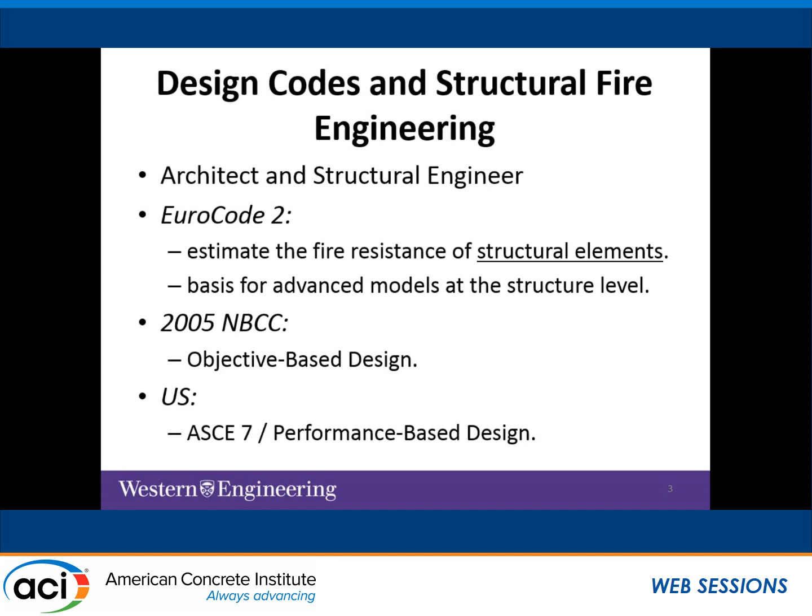So my research objective is basically to develop simple methods that can develop the engineering sense. One of my great instructors said, a calculation that you can make on the back of an envelope is much better than 100 pages of computer output. So that's what I'm trying to achieve, to get things in a simple way and develop tools to analyze the structure first and then to assess its capacity second. So I'm trying to do both.

And I'm trying to cover the overall picture here, and as time allows, I might go into one of the tools that we developed in a very simple way. So our first main challenge, and it's a challenge that you can find even in the Eurocode, with the isotherm method.

The non-uniform distribution of temperature within the section means that your thermal strains are non-uniform. So imagine a concrete section with non-uniform thermal strains. Can this happen? Can you have a section with this shape? Can the section develop such a curved shape?

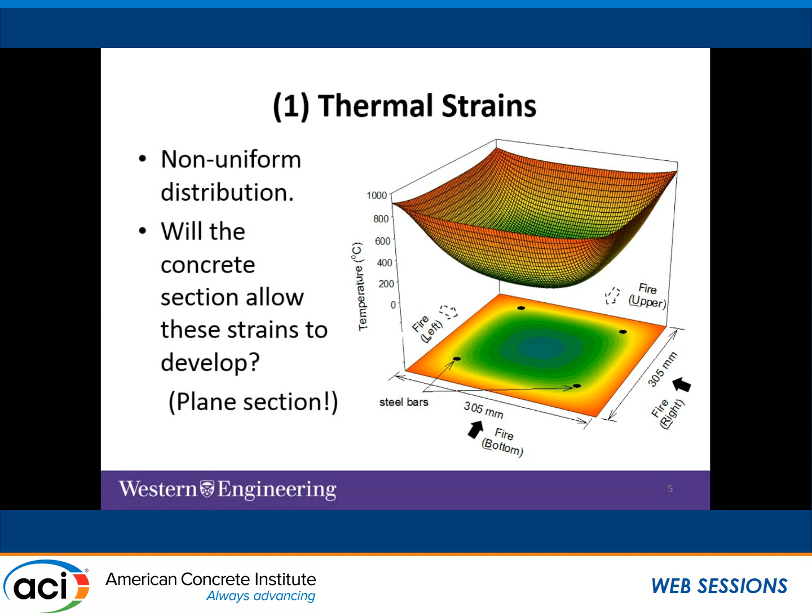And based on this, we started to look at how it's happening. So this was our first challenge, and I'll say in a second how it works. The second challenge was the 2-dimensional temperature distribution, which is really hard to deal with, while most of your structures, most of your beams, most of your columns, you are analyzing them at the end for simple bending, one-directional bending. So we said, okay, we want to simplify it to be able to analyze them for single bending.

And the zone method, which was mentioned before today, is a sectional analysis where you divide the section into layers. So if we are dividing the section into layers, if I do the temperature distribution in the section, which is shown here by the contour lines, the temperature in each one of the small squares is different. But the temperature for the layer, for bending analysis, I can get using an average temperature. And then we started to think what kind of average temperature to use.

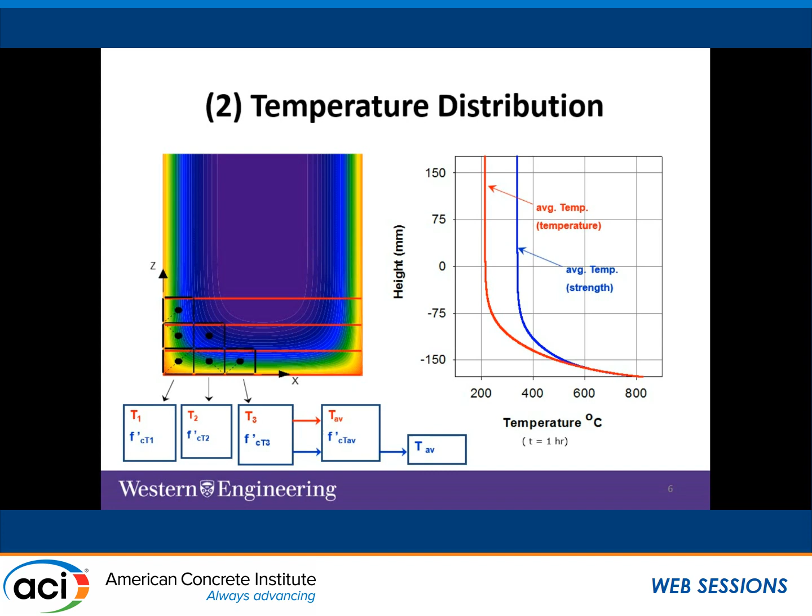Then the strains: as was mentioned, you have transient strains, you have thermal strains. All of those strains are linear functions of the temperature. So because they are linear functions of the temperature, taking the normal average of the temperature will be good to evaluate those strains. So we evaluated 2 temperature distributions: one based on the average, and one that will give you the average strength.

So again, I'm speaking about the same point that I started with: if this is a beam, your temperature will look like this if you cut a section in the middle, and it's trying to induce more thermal strains at the bottom. And because the temperature is trying to induce more thermal strains at the bottom, your section will remain linear at a certain point in between this curve.

And if you look at the section, any point that is above the line is in tension. Any point that's below the line, so this area, is in compression. So this concrete area is in compression, while this concrete area and the steel bar are in tension. This steel bar is in tension as well. So doing a couple of trials, you can get the lines that will lead to equal tension and compression, and those are self-equilibrating forces, self-equilibrating stresses.

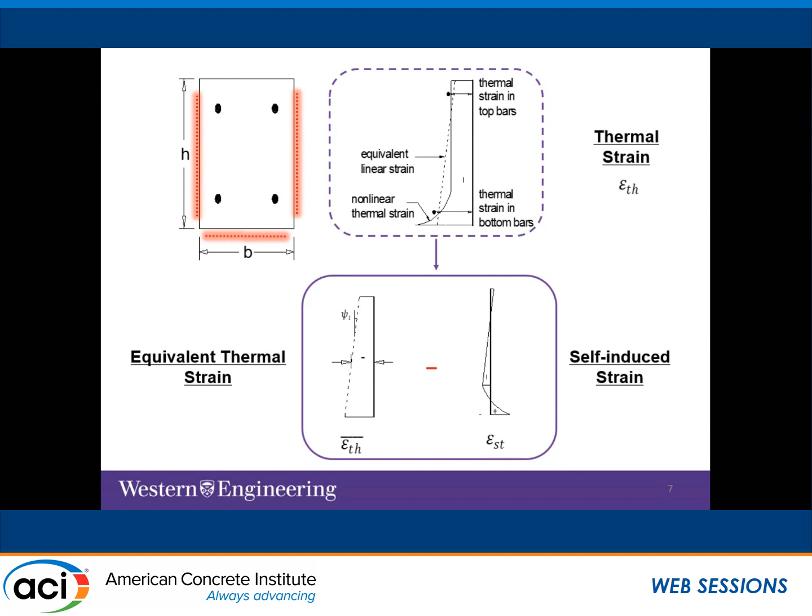If you have a positive bending, your steel is exposed to temperature, which means that the steel loses its Young's modulus, and it's much lower. So for this steel to develop any force, you need to move it a little bit more than the steel in the top, which will make this line almost linear. So when you have strain in the steel in the bottom a little bit more than the top, your linear strain is having a smaller curvature. So this was the direct reason for this.

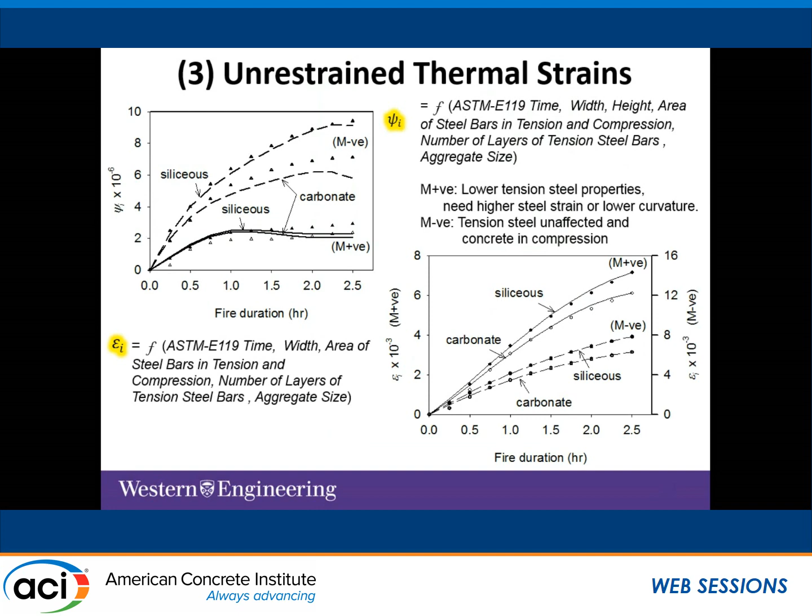For negative, your tension steel, which is in the top, is unaffected, and concrete is acting in compression. Even if it's affected by fire, its Young's modulus is not affected as much as the steel is affected.

Then we applied the sectional analysis at elevated temperature, and we started by adding this initial self-induced strain. Once you have it and you have layers in your section, we started first with the column section, and we started to add uniform strain across the section, adding it to these values, going to the material properties, and figuring out the capacity of the section.

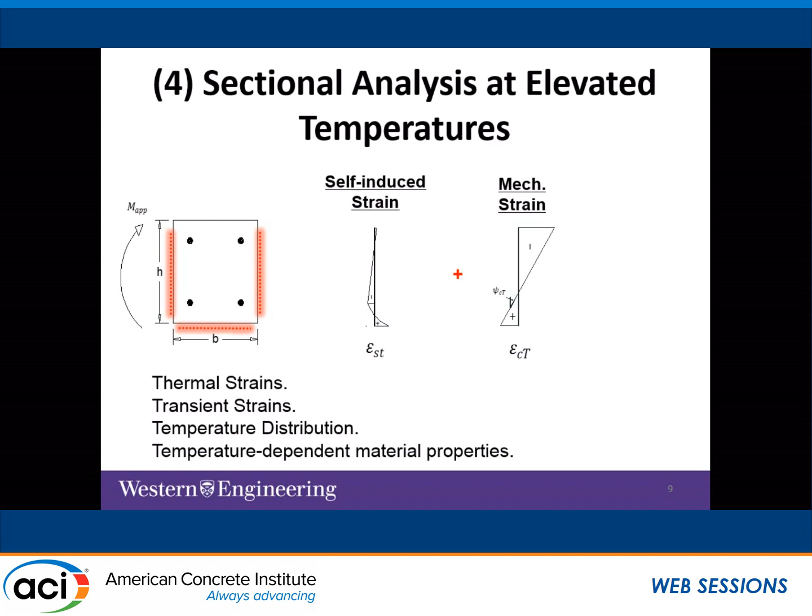We considered the thermal strains in this way. Transient strains were considered in the material model for concrete. And we considered, of course, the temperature distribution and temperature-dependent material properties. And we came out with two curves for each section. One defines its behavior as a column, and one defines its behavior as a flexural member. So one gives you the axial force versus axial strain, and one gives you the moment versus curvature.

And you can see right away the curve is not starting at point 0. And this start, which is here and here, is linked to psi I and epsilon I that are coming from the thermal analysis. So because of the thermal analysis, there were some strains induced in the columns without any load applied, and those strains are represented here. Some curvature induced in the section, and that curvature is presented here without any moment applied. We are assuming an unrestrained section. If you have a restrained section, you have to use those to figure out your restrained condition.

Then we got the full P-epsilon curve and the full moment-curvature curve, and the secant slope at any point will give you EA effective and EI effective for the section. And again, we simplified those two terms, EA effective and EI effective, and we give them as equations, not easy equations again, but equations that are a function of a lot of things, including the axial load level and the moment level. And this is again for a standard fire curve.

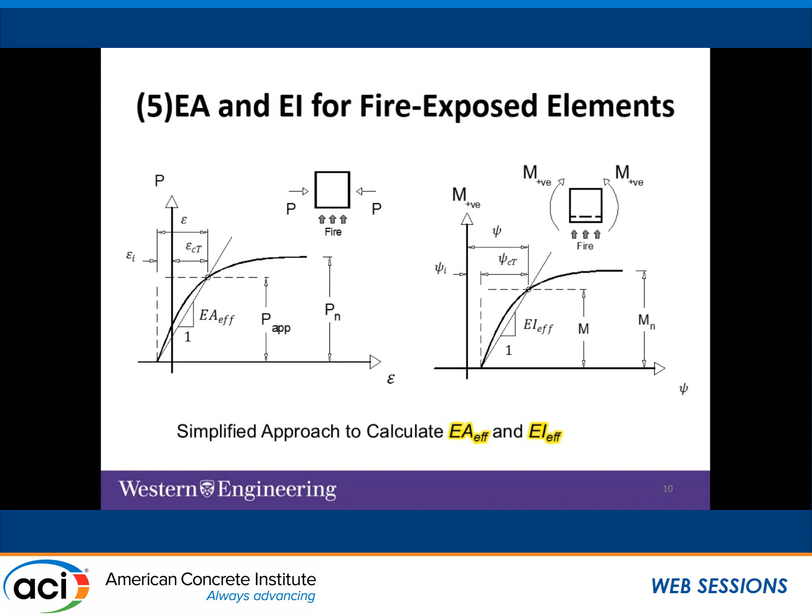Then we started to analyze continuous beams and frames. We tried this procedure for many elements. So first, as a procedure, we suggest that you first use SAP, or any program. You can calculate your primary moments and axial forces in different elements. Identify elements exposed to fire, go to our model, calculate your epsilon I, psi I, EA effective, EI effective, convert them to elongation and rotation, and apply this elongation and rotation to the structure, which will give you what we call secondary moments. Get the secondary moments, recalculate EA effective, EI effective, and the primary moments, which are going to change, and do the loop again.

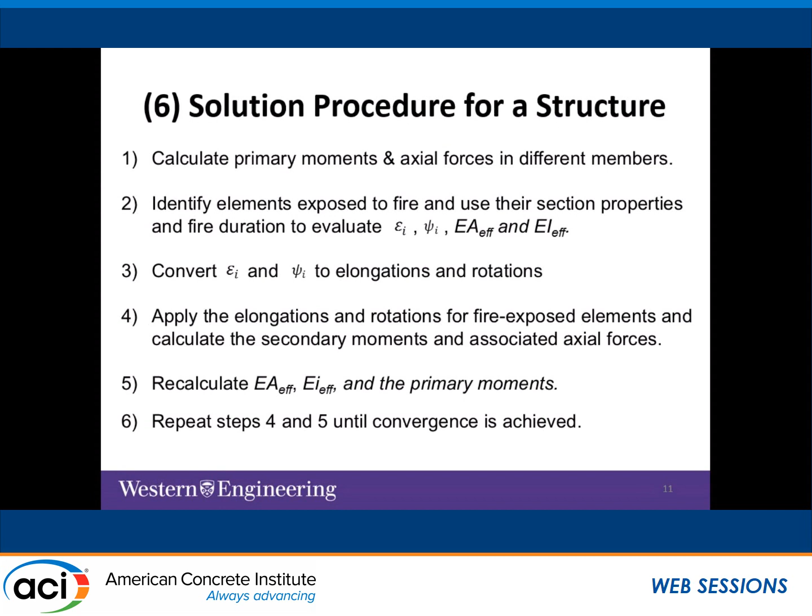We use the analogy between the behavior of pre-stressed concrete and reinforced concrete. So in restrained action in pre-stressed concrete structures, you get what is called secondary moment. We found that this is similar to what's happening due to the thermal deformation. You get what we call secondary moments here. So we applied this to continuous beams.

My time is running out, so I'll have to be a little bit quick.

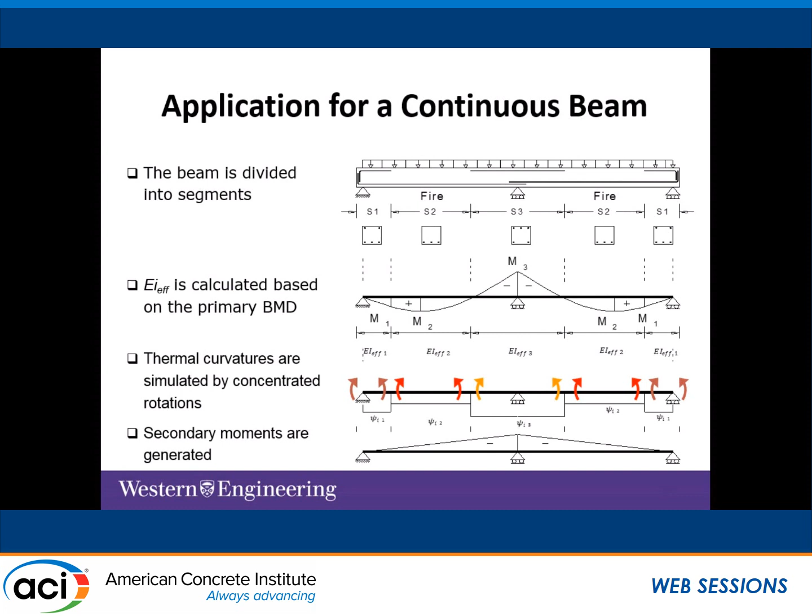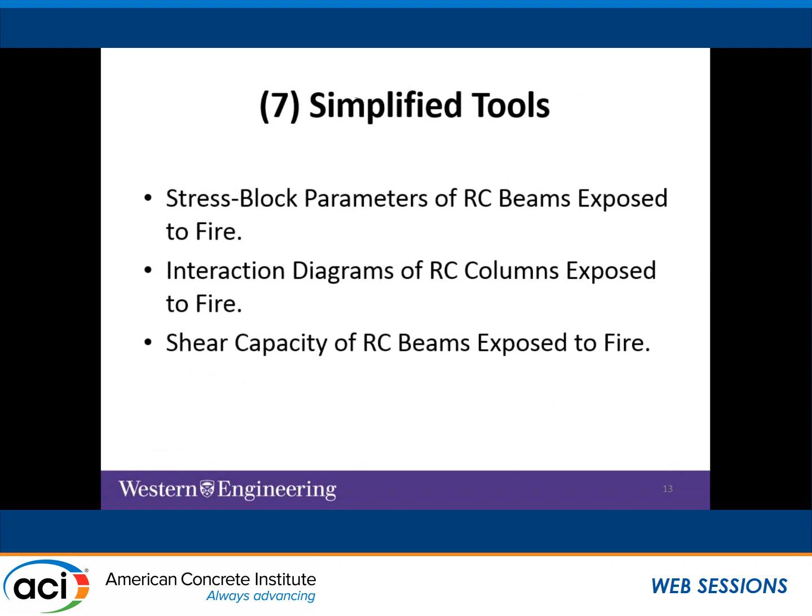So we applied this to continuous beams, and it's published in a paper already. And we also developed simplified tools that will give you the stress block parameters for reinforced concrete beams, can sketch for you the interaction diagram for a reinforced concrete column, or can predict for you the shear capacity for reinforced concrete beams.

The last challenge that we were faced with is the definition of the strain at failure for concrete. When is your concrete going to fail? For a column section under axial load, the column will fail at the lowest strain. Knowing that the stress-strain curve for concrete gets more ductile as you heat the concrete, your epsilon naught, the strain defining the peak stress, will be shifted to the right. So the points that define the maximum strain are actually the lowest in temperature. So the lowest temperature will define your failure strain, which is the core concrete. And this is for a column section.

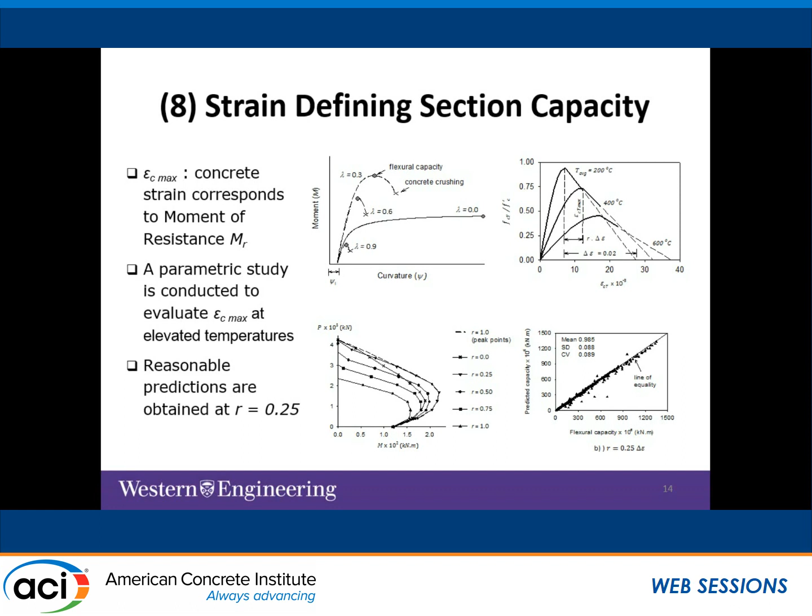But for an interaction diagram or a moment section, you'll have your failure somewhere in between. And we based this on many trials. If this is your failure strain for different points of the section, you start drawing the tangential line, and based on this, you can get your failure strain. And for this specific example, this was the point initiating the failure.

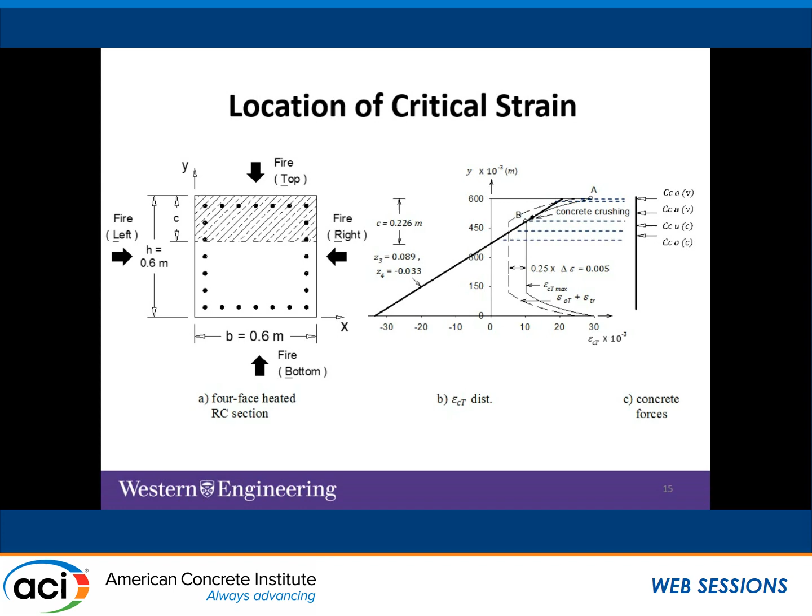I know that I'm done with my time. But there's just one thing that I want to show, and then I'll be out. Sorry.

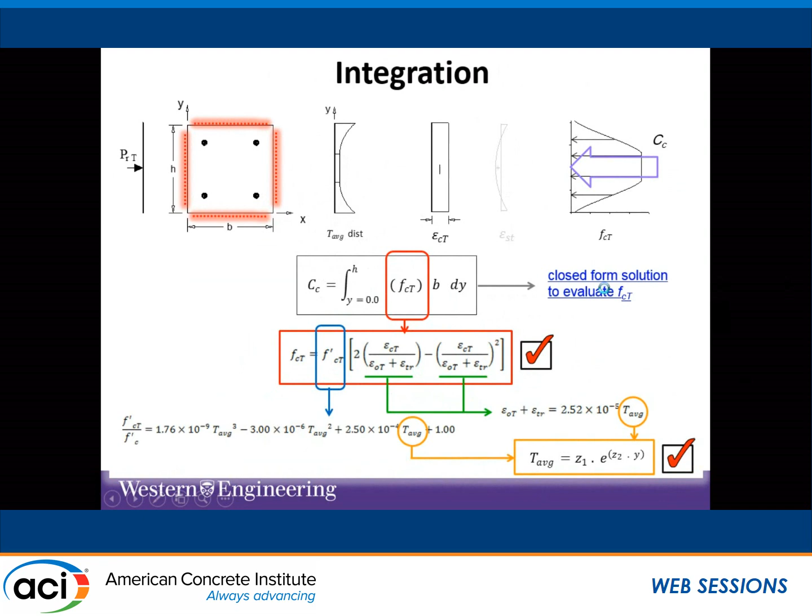I want to show you an example of what we used as an Excel sheet. So this is a simple Excel sheet for axial load capacity. You can enter your reinforcing bar information at the bottom of the Excel sheet, so you'll enter the coordinates for each bar and the area of the bar. And then at the top here, you'll enter the column dimension. I have here 305 by 305, 1 hour fire exposure. And then it will give you the strength of the column, as given here, 2,654 kilonewtons.

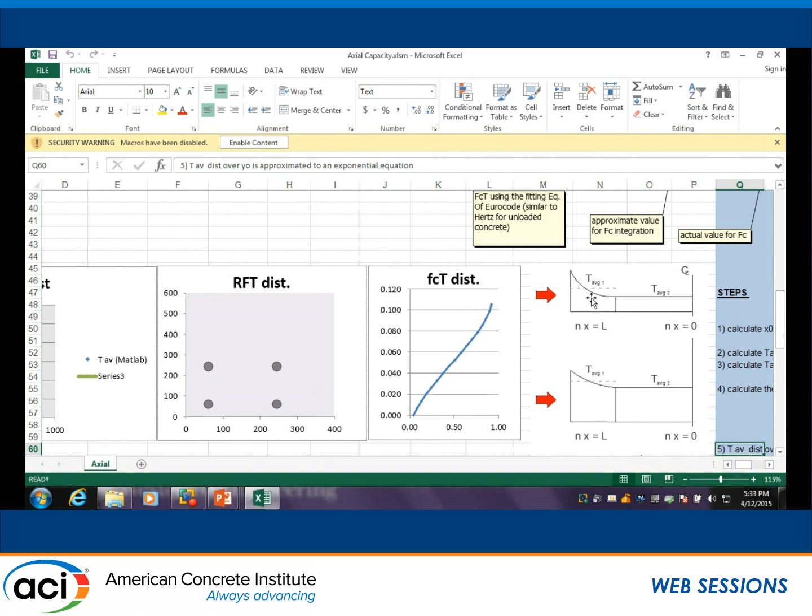And if you go down here, you'll even have the temperature distribution, the FCT distribution within the section. So it gives you information that allows you to understand the problem, not only to analyze it, to be able to understand what you are doing. That's my goal from my work. I have similar spreadsheets for everything that I mentioned here.

So if we increase the fire duration to 3 hours, suddenly your strength drops to 1,000 kilonewtons. So at the moment, my challenge is to convert this to natural fire, any fire temperature, not only the standard fire curve.